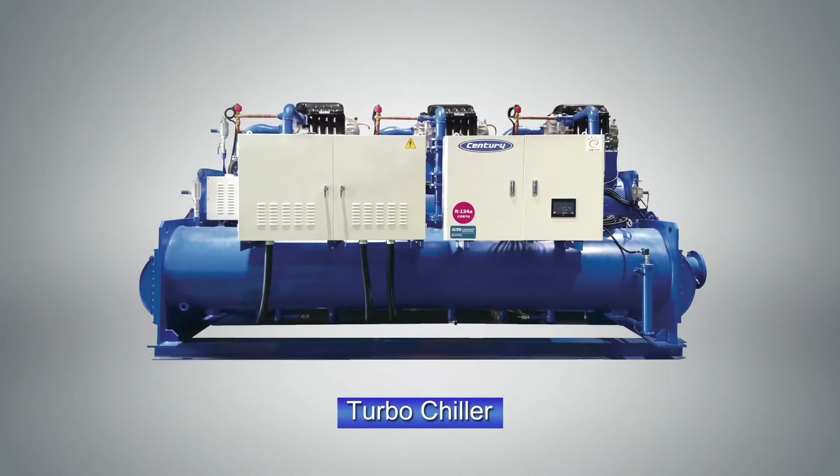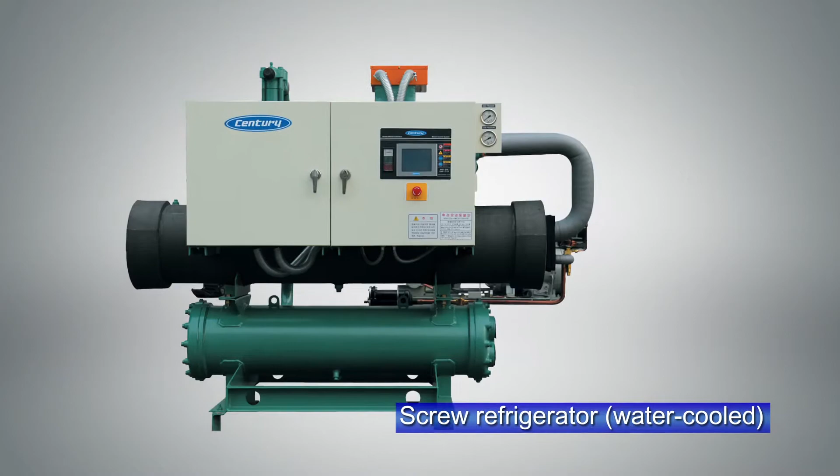Kiturami jumped into new markets with its know-how from their subsidiaries, Kiturami Bumyeong Air Conditioning, Shinsung Engineering, and Century in the field of refrigeration and air conditioning.

Kiturami is growing into an energy device developer such as heating, air conditioning, refrigeration, as well as new and renewable energy industry that leads low-carbon green growth.

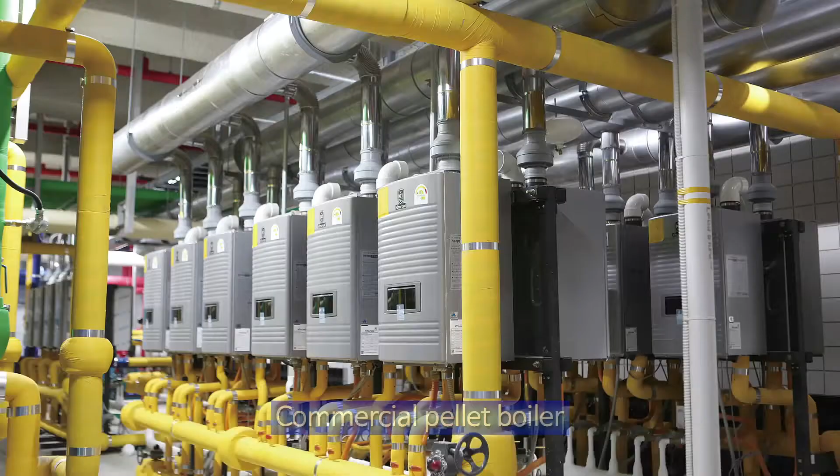Kiturami continues its strides to create the best and optimal heating and cooling culture.

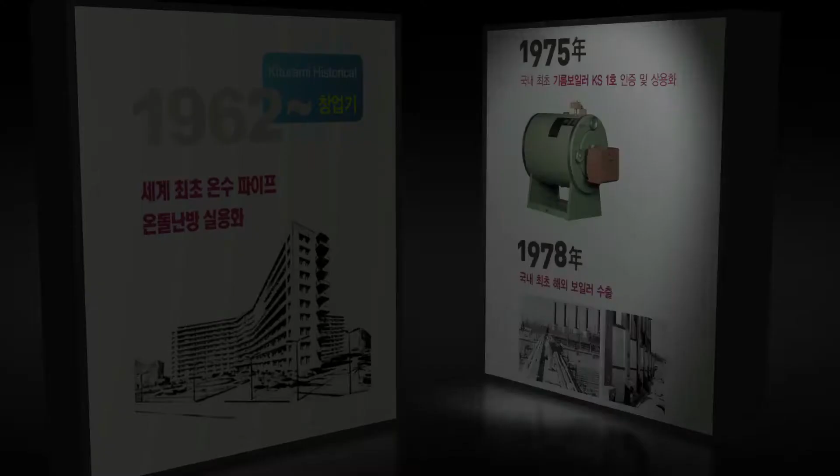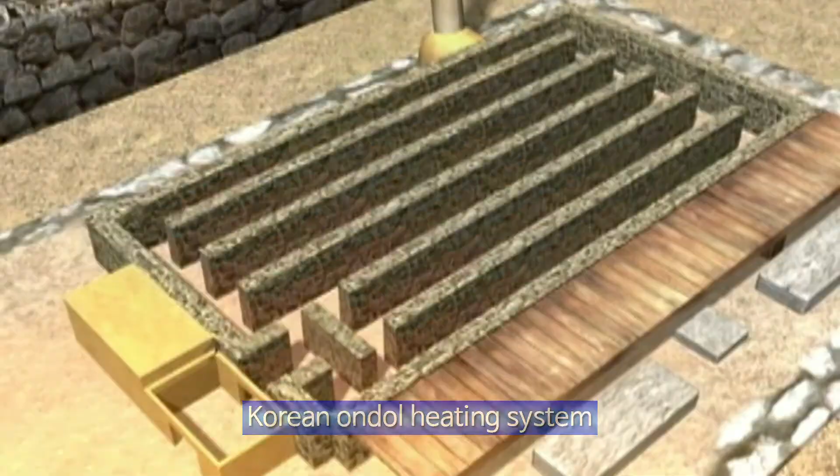The history of Kiturami is the history of Korean boilers. Based on Korea's traditional ondol heating culture, Kiturami opened an era of residential boilers in Korea by installing boiler heating units in Korea's first apartment complex, Mapo Apartments, in the 1960s.

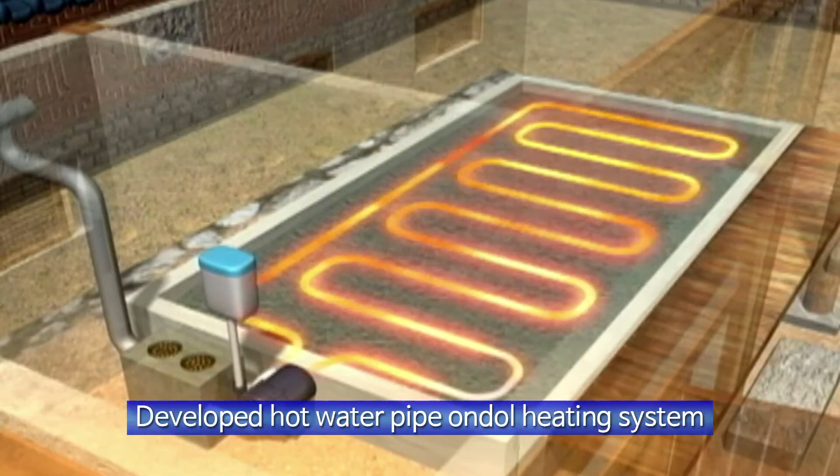With its improvement of the ondol heating system, which uses water pipes to heat the floor, Kiturami developed KS-1, Korea's first oil-fueled boiler, in 1975.

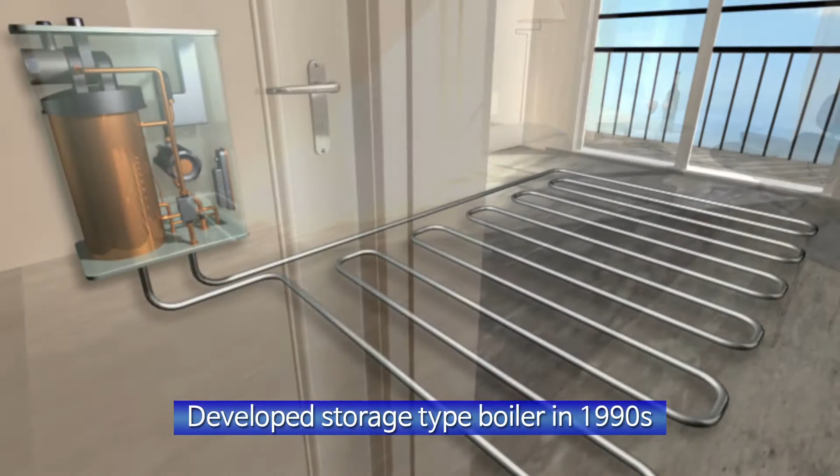In the 1990s, the city gas system was introduced and allowed large corporations to import and distribute instantaneous gas water heaters from Europe, while Kiturami developed storage-type gas boilers based on the ondol heating system.

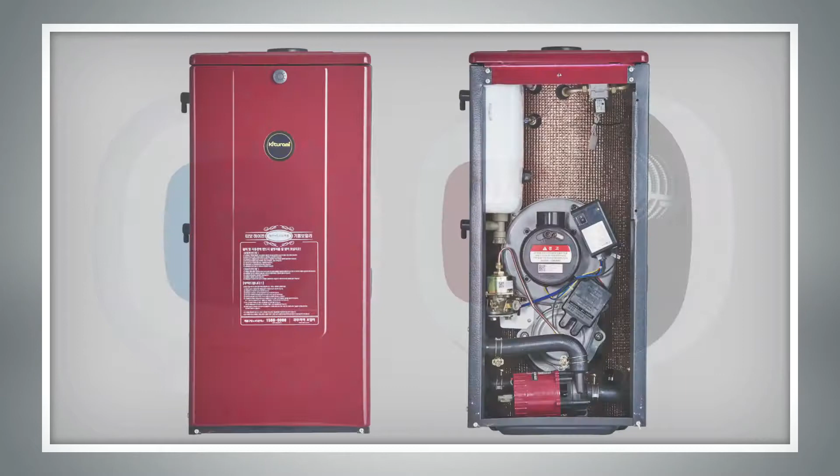With firm conviction to enhance technologies, Kiturami received the Gold Tower Order of Industrial Merit at Korea's Technology Awards. In addition, the chairman was selected as one of the 60 engineers who built Korea and 100 Korean technology leaders. Kiturami will continue to support the growth of Korean industrial machinery technology.

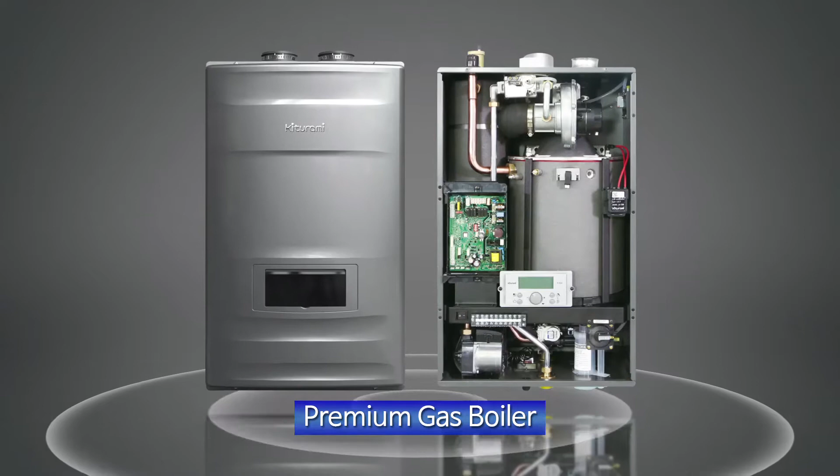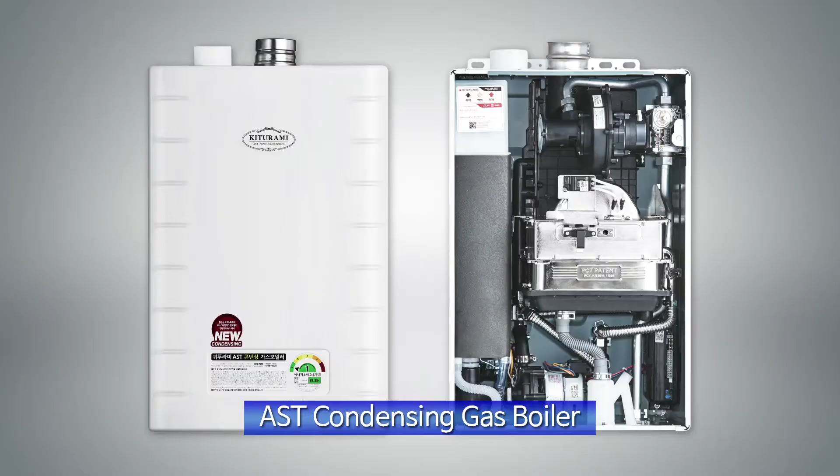Reverse condensing boiler and premium gas boiler are Kiturami's world-class inventions that applied condensing technology to hot water storage boiler structure. AST condensing gas boiler is a result of combining secondary heat exchange condensing technology in instantaneous gas boiler structure.

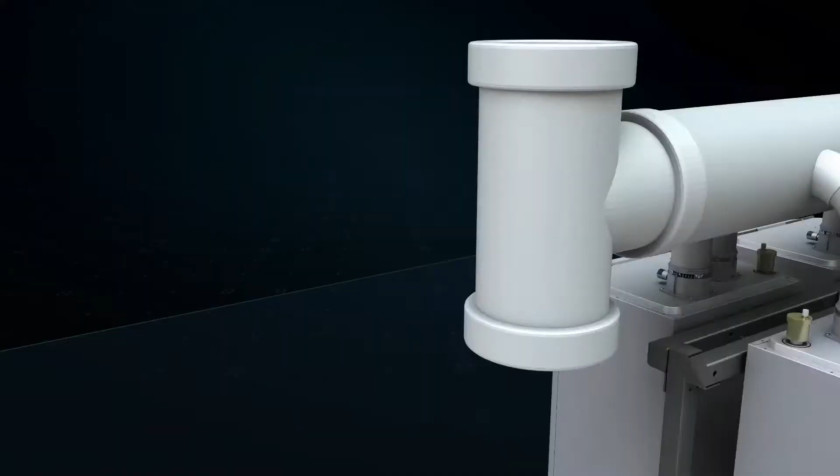Clean heat electric hot water and heating system, a new indirect heating technology that can provide hot water and heat air at the same time. Cascade system, a combination of small boilers that can replace conventional industrial boilers and drastically improve operation efficiency.

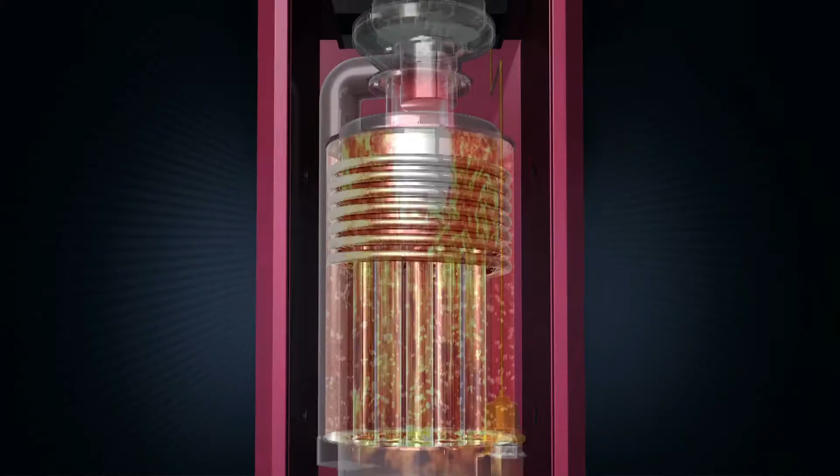IoT boiler system, making it easier to use boilers using smart technologies. Reverse condensing oil boiler, much lighter and smaller but more efficient. Micro CHP, a cutting-edge residential cogeneration system, will lead the future heating unit market.

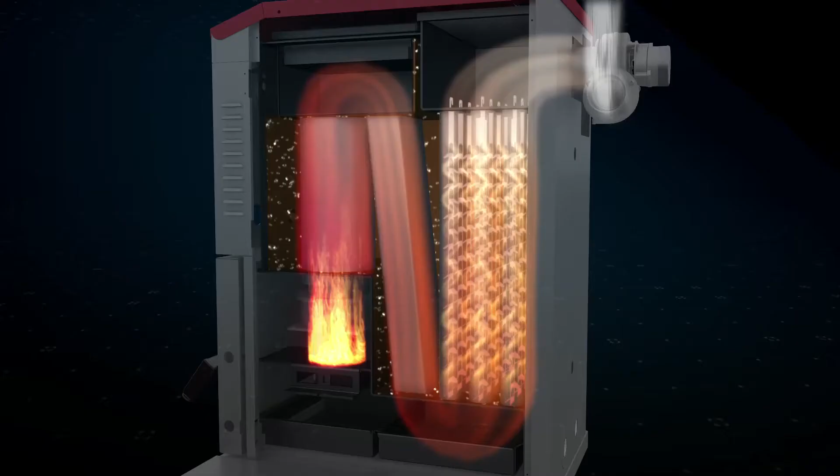Kiturami pellet boiler is an environmentally friendly product developed for and exported to China. Smart ondol pad, Kiturami's newest technology developed to distribute Korean traditional ondol culture to the world.

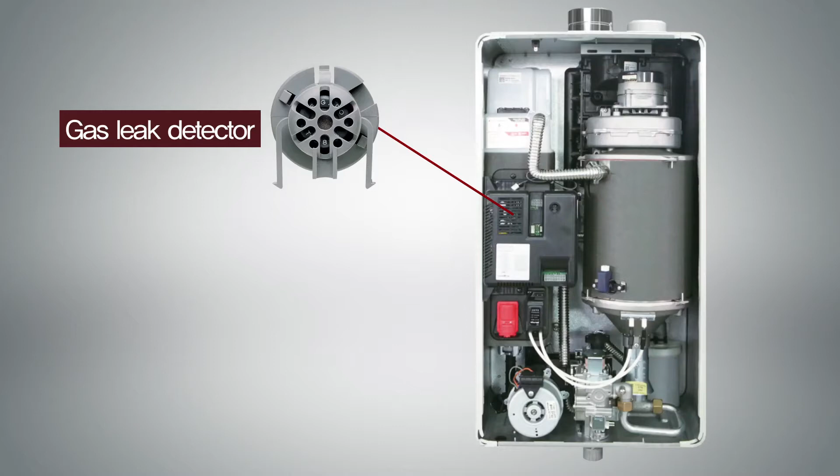In addition, Kiturami puts customer safety first. Kiturami developed and patented technologies for a gas leak detector and an earthquake detector to prevent natural disasters. Its efforts earned Kiturami a reputation as a leader that manufactures the safest products.

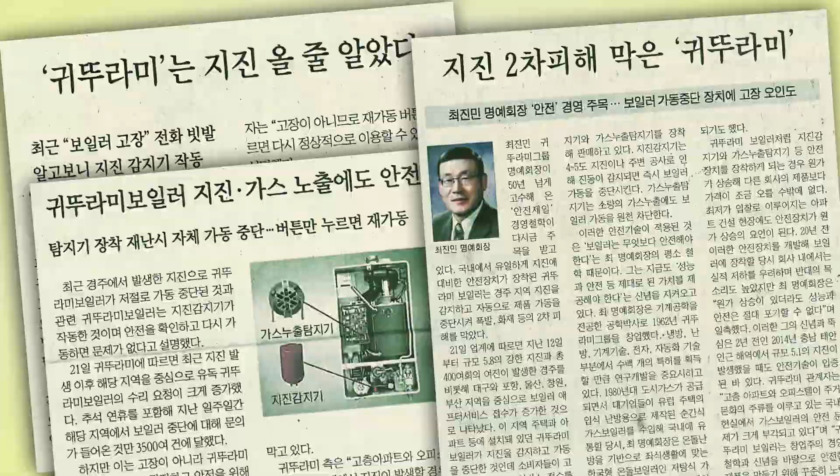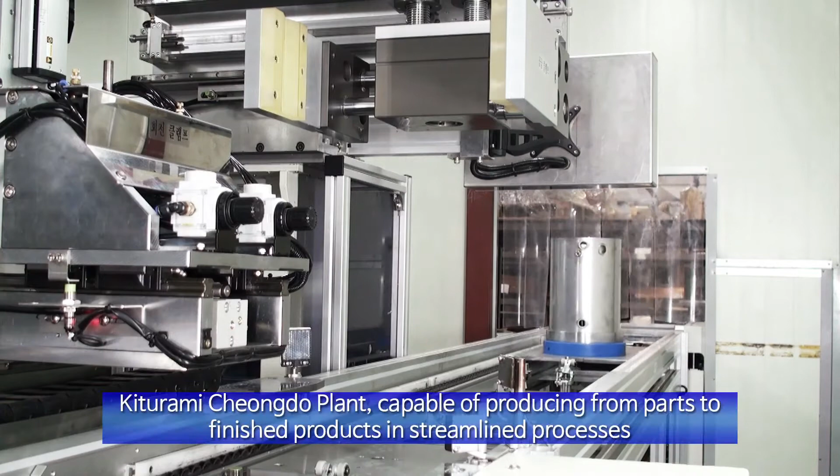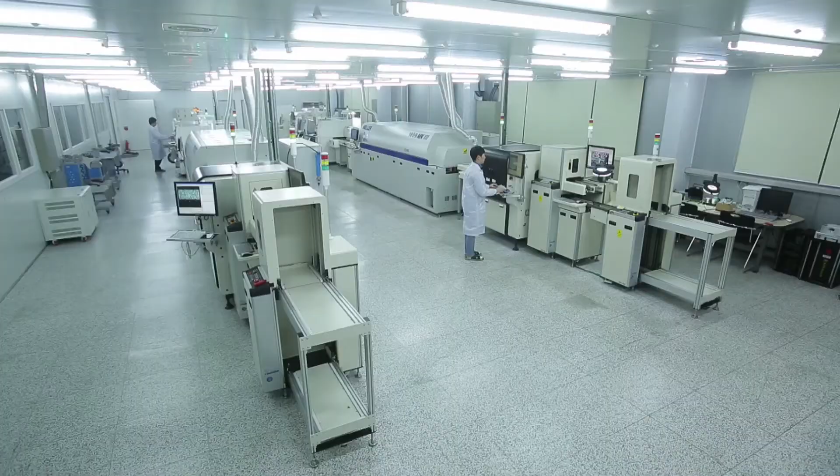98% of its products are manufactured or developed in Korea, with a production capacity of 1.2 million units a year. The Cheongdo plant is capable of streamlined manufacturing processes, and it uses SMT facility that connects electronic parts to PCB via soldering. In addition, its automated inspection facility maximizes production and section-by-section inspection capability.

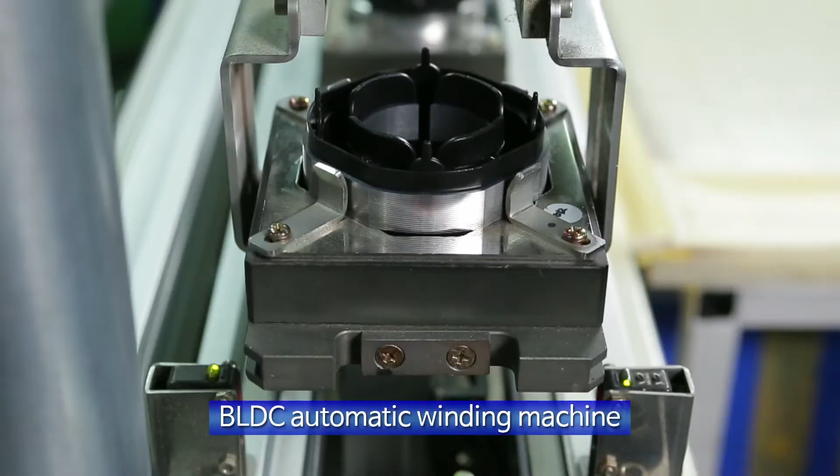BLDC automatic winding machines can manufacture 550,000 products a year at maximum capacity, as well as heat exchanging brazing furnace that enables fully automatic large-scale production.

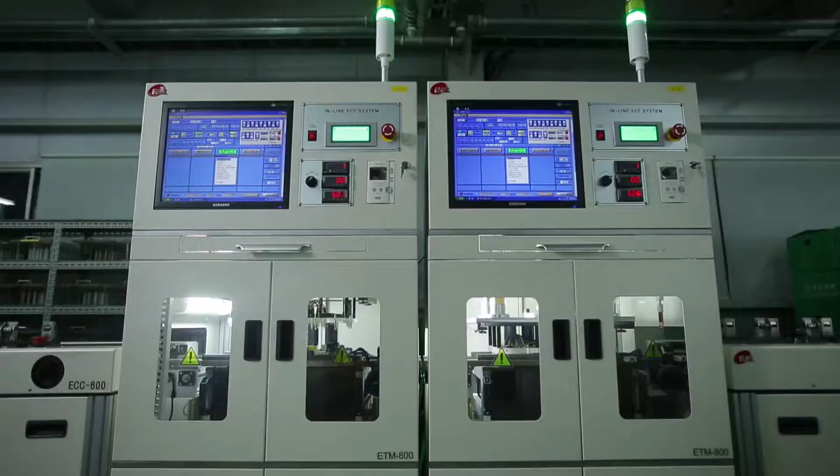Kiturami develops and manufactures each major part in order to secure the superiority and uniformity of product quality, thereby realizing its founding goal of manufacturing the world's best products.

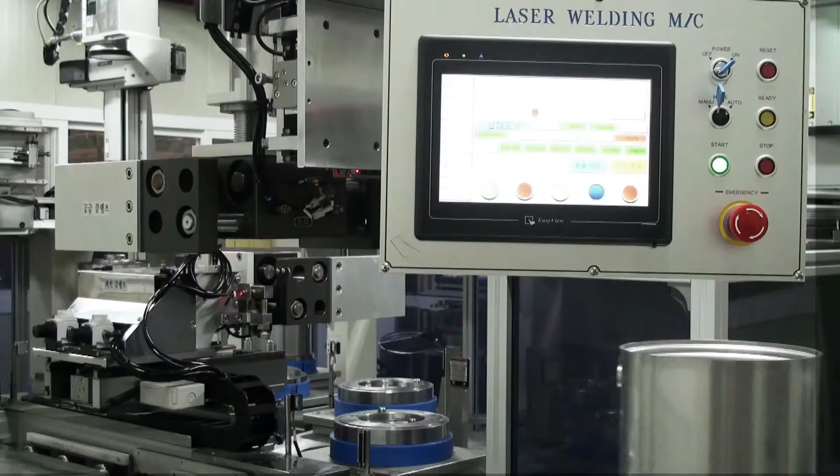Cutting-edge heating and cooling product manufacturing complex, Kiturami Asan plant, ensures safety and enhances efficiency by using state-of-the-art automation facilities such as laser welding devices for manufacturing hot water storage heat exchange boiler units.

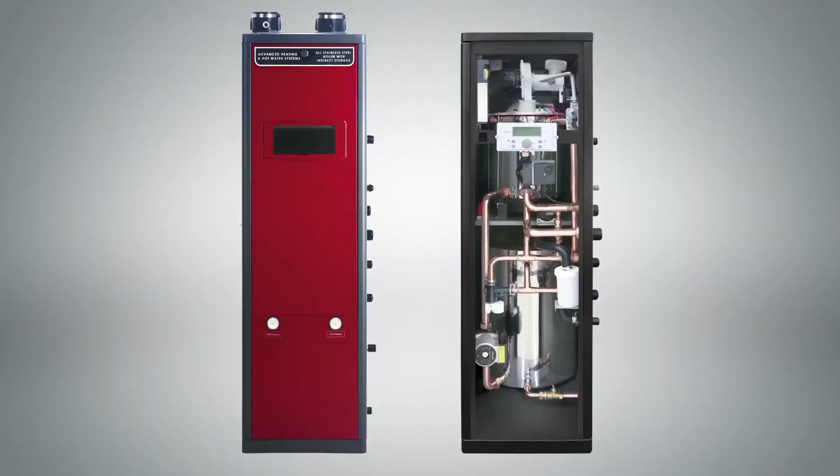Simultaneous manufacturing of boilers, air conditioners, and refrigeration units, and year-round operation without downtimes, ultimately drives down manufacturing costs. This leads to remaining competitive in the market trend of fusing heating and cooling units, while establishing a stable foundation for growth.

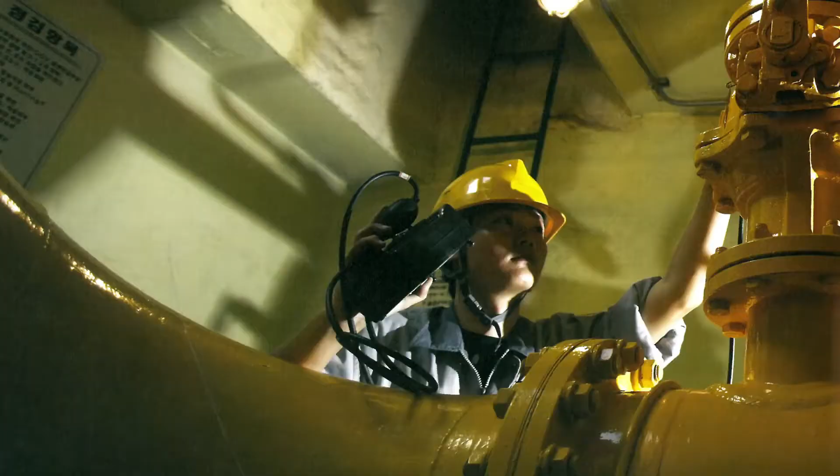Kiturami Energy supplies city gas to 400,000 households in the center of Seoul and responds to customers' demands for energy. Also, Kiturami Energy is striving to expand the supply of domestic city gas and ensure stable supply.

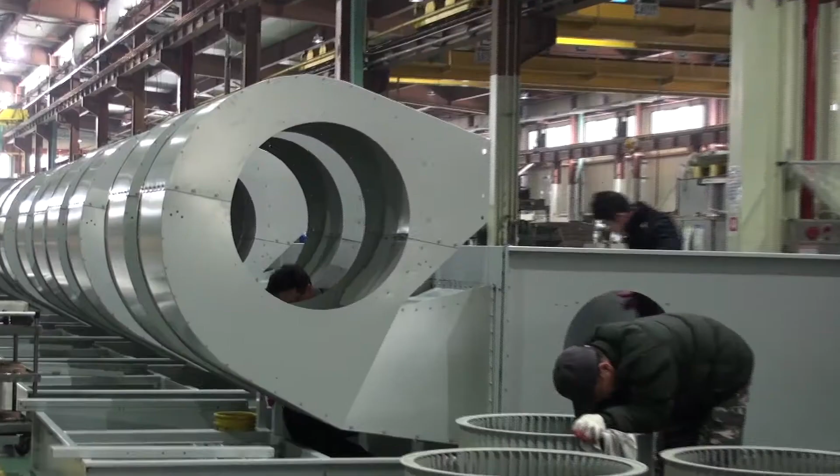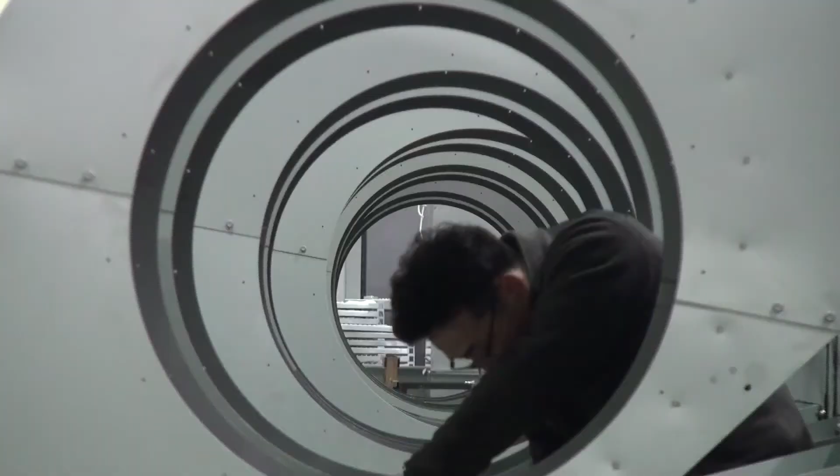With dedicated investment and efforts for R&D in the field of refrigeration and air conditioning, Kiturami obtained ISO 9001, ISO 14001, and KS certification, in addition to KEPIC certification for nuclear power plants. Kiturami also acquired Public Testing Facility certification, High-Efficiency Energy Device certification, and AMCA SEAL certification, as well as ASME certification for boiler, pressure vessel, and nuclear power plant facilities, and Europe's CE and United States UL certification.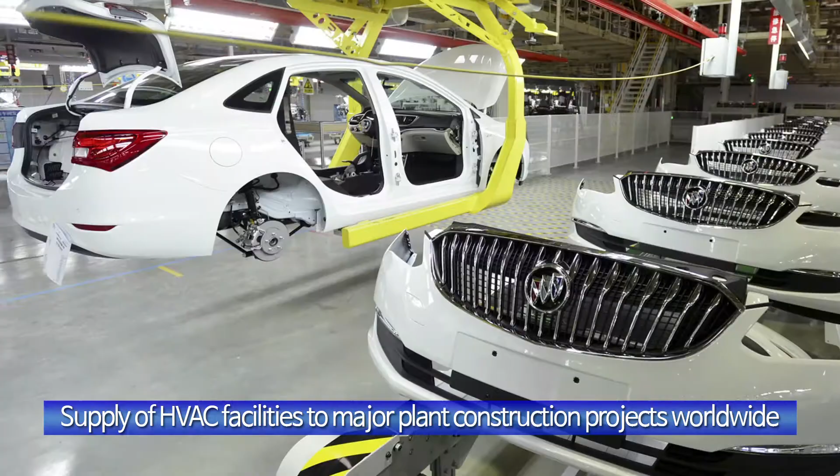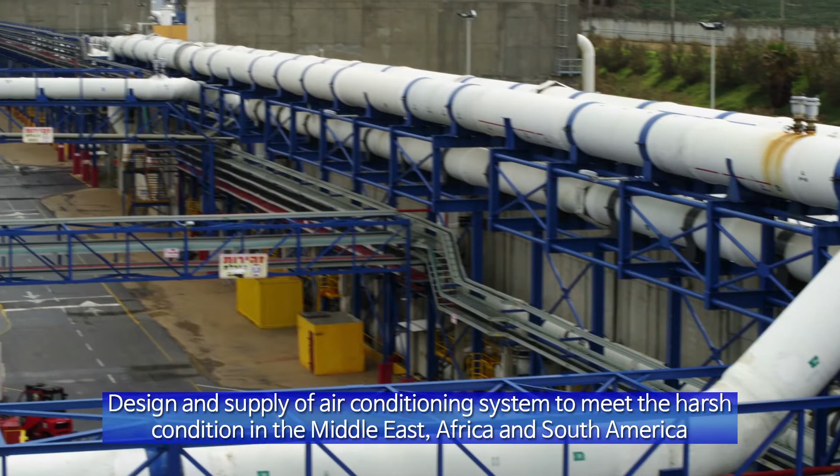In the overseas plant sector, based on 35 local networks in 30 countries, Century supplies HVAC equipment to power plants, chemical plants, automobile, and semiconductor factories. Especially in the Middle East, Africa, and South America, Century has provided optimal air conditioning systems to cope with harsh environments such as hot air, sand winds, and daily temperature range differences. Century is recognized for its high efficiency and environmentally friendly technology in Dubai, China, Vietnam, Saudi Arabia, Libya, Algeria, and Mexico. Accordingly, Century won the top $30 million Export Tower Award for its contribution to the increase of exports.

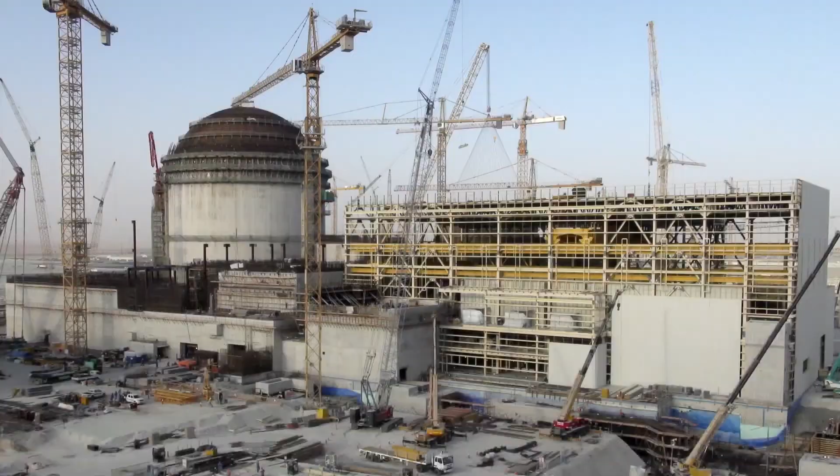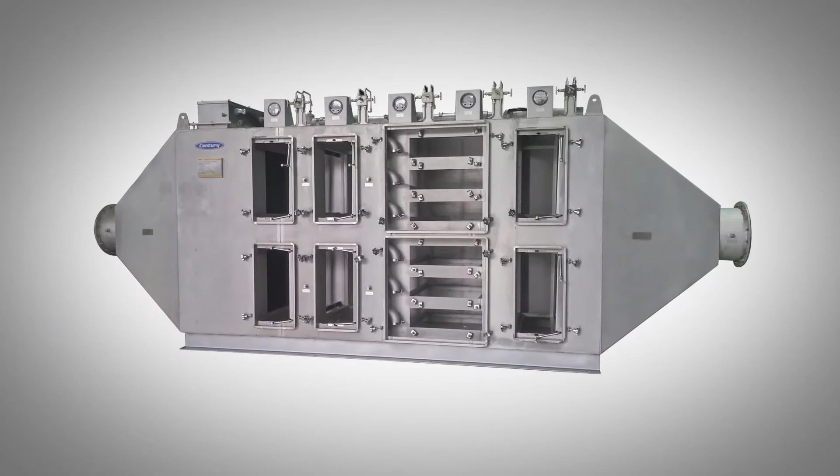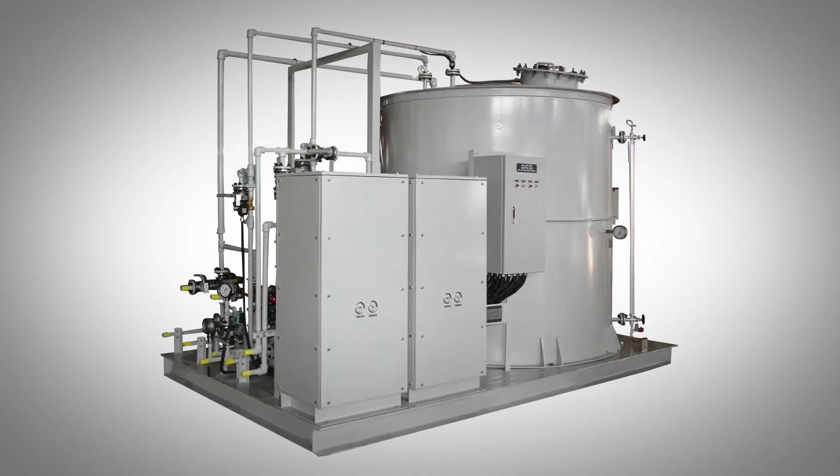Participating in the construction of Hanbit Nuclear Power Plant Reactor No. 1 in Korea, the next-generation model Westinghouse AP1000 in China, and UAE Barakah Reactor No. 1, 2, 3, and 4. For 3 decades, Century conducted design, manufacturing, technical support, supervision, testing, and inspection for HVAC and air cleaning devices. Based on such experience and trust, Century holds the largest delivery performance in Korea and exports worldwide. In particular, the world's largest engineering firm Bechtel recognizes the level of Century technology and uses Century's refrigeration and air conditioning system.

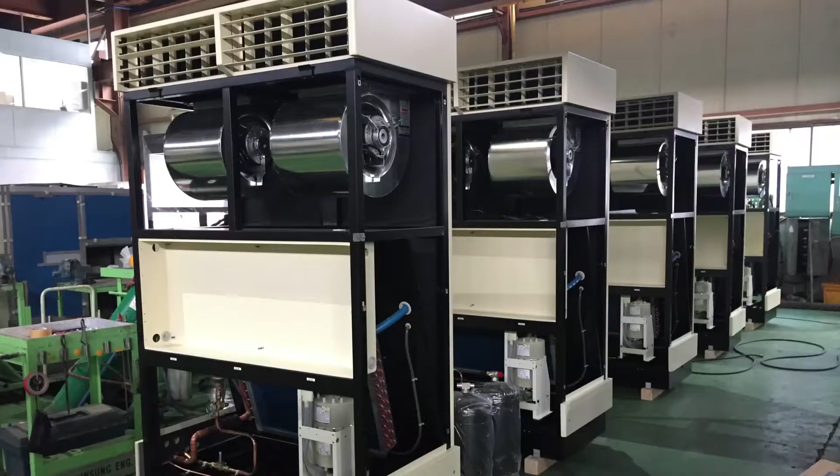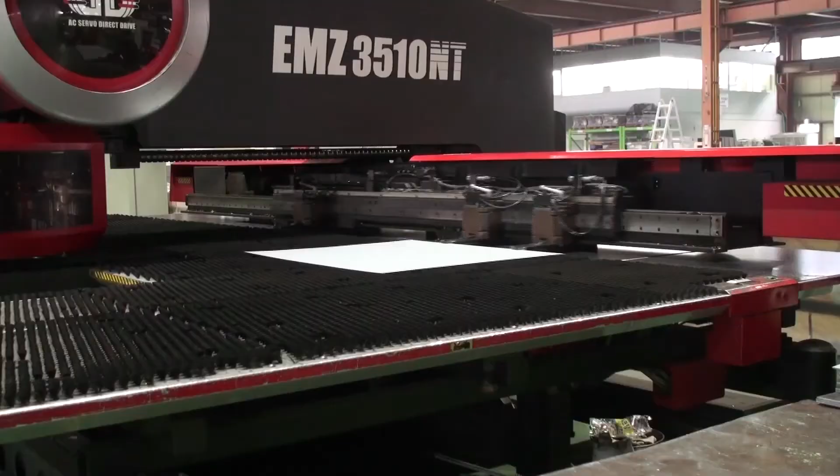Onboard refrigeration and air conditioning is a specialized area that requires a higher level of technology. Century develops and delivers dehumidifiers, freezers, special air ventilation systems, and cutting-edge HVAC facilities to military warships and submarines. In addition, Century has delivered the most product units to the military and the maritime police in Korea, making great contributions to Korean shipbuilding industries climbing to the top.

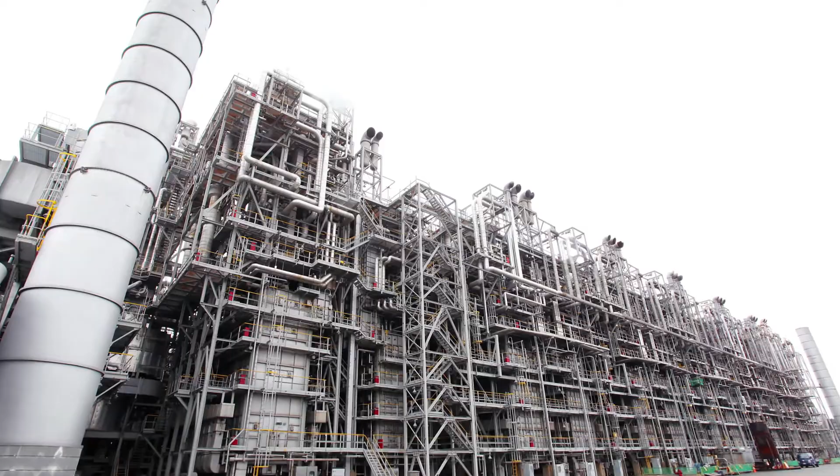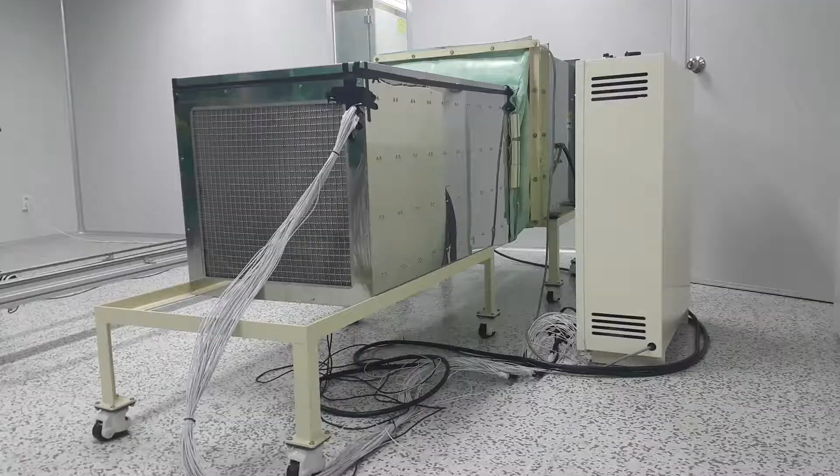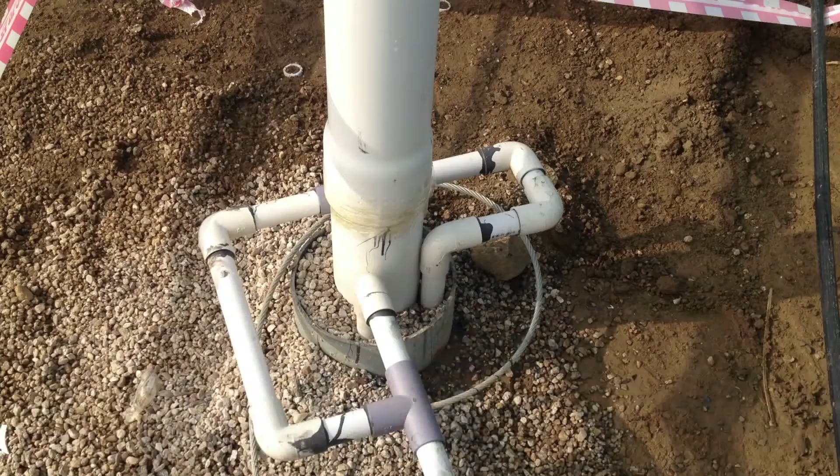Century won the Jang Young-sil Award from the Ministry of Science and Technology for developing Korea's first dry room system. Century built clean rooms and heat and humidity-resistant facilities for Samsung, LG Chemical, and Hynix, also specializing in producing BioSac air conditioners that can sterilize up to 95% of H1N1, MERS, and other viruses. Century developed a geothermal high-efficiency heat pump and introduced differentiated methods of outdoor drilling construction. As a leader in new and renewable energy for public and private buildings, Century constantly works on improvement and development of new technology.

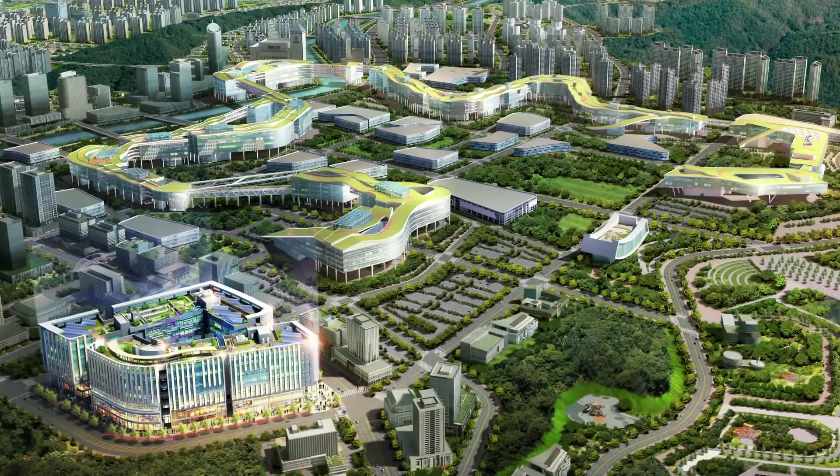Century developed a customized Korean vacuum waste collection piping system, which is installed in Songdo New City, Sejong City, and other large apartment complexes. Century is making its best efforts to develop and distribute systems for low-carbon, green growth.

With its principle of walking the righteous path, Century has received support from domestic and overseas customers and recirculates its profits to the community. Since the beginning of its history, Century has contributed 270 billion Korean won over 30 years to establish and operate the Century Culture Foundation in 1985 and the Century Welfare Foundation in 2003. Century continues to share corporate profits with the community at large.

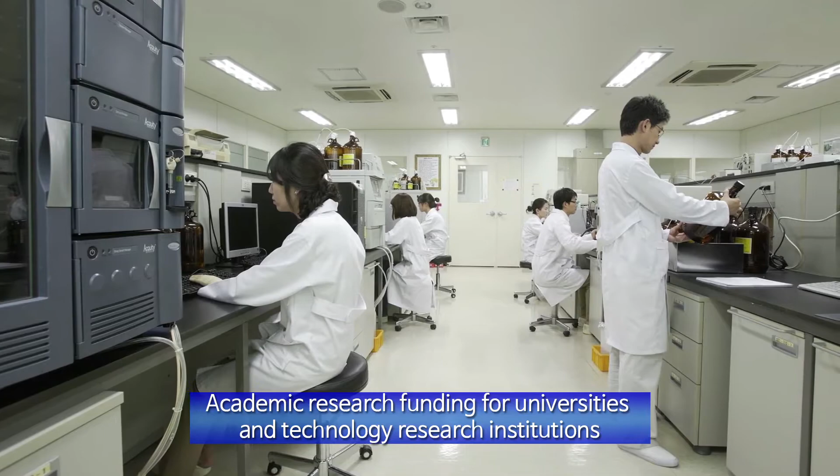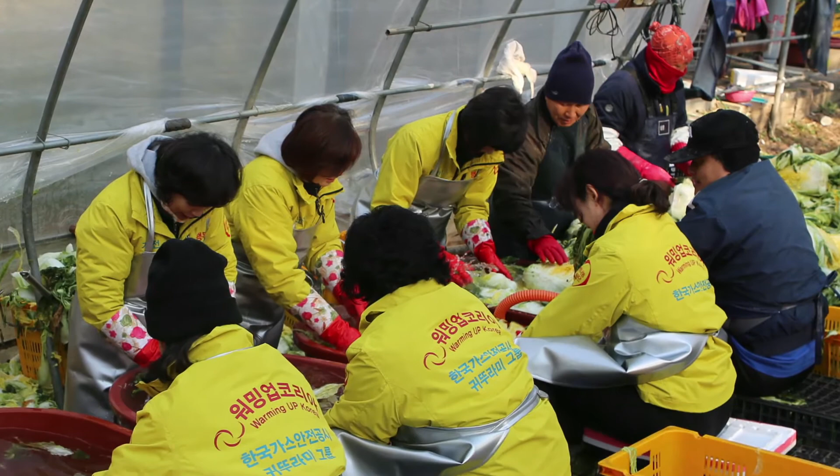Century Culture Foundation has provided scholarships to 50,000 students, including funds for academic research, universities, and institutions, totaling 40 billion Korean won. Beginning with the Housewives Volunteer Service Group in 1995, Century donated 50 billion Korean won to found the Century Welfare Foundation, approved in 2003. For 20 years, Century Welfare Foundation has served social welfare institutions including nursing homes and facilities for the handicapped. Century has received commission to operate the social welfare center in Gangseo-gu office since 2016, growing into a comprehensive social welfare foundation.

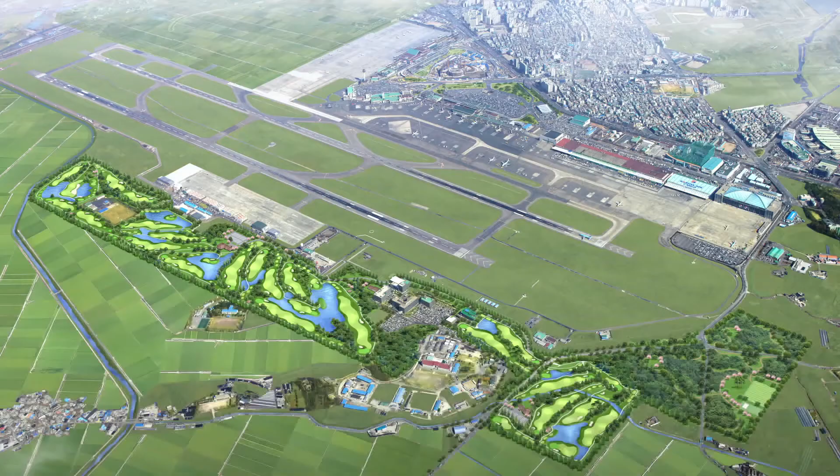In addition, Century works with TBC Broadcasting Culture Business and conducts a diet food business, the Dr. Robin Project. Century also built a hot spring spa near the DMZ and contributed to the benefit of local residents and the local economy by creating and operating a cultural and leisure area, including Insul 27 Golf Club, in the suburban area of Gimpo Airport.

After maintaining integrity, honesty, and modesty for the past 50 years, Century will continue to work for a better world with constant dedication.